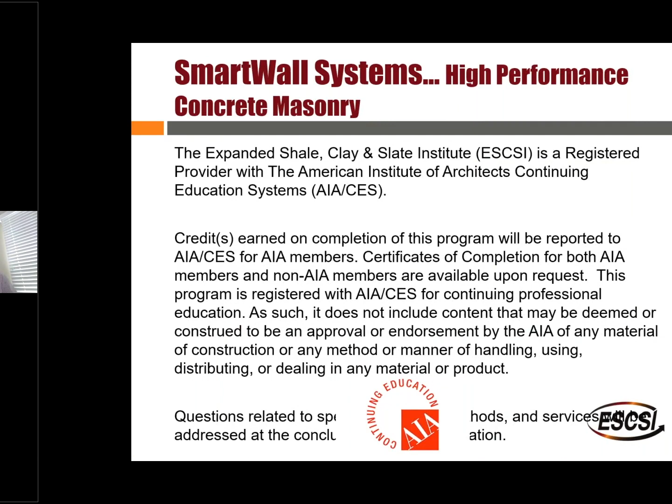This is an AIA registered, or will be registered, presentation - a little bit more bookkeeping. For those of you that need the learning objectives for AIA: we're going to learn what SmartWall CMU are, understand how they outperform normal weight CMU, develop awareness of how lightweight next gen CMU greatly enhance wall performance, and then learn how to properly specify these materials.

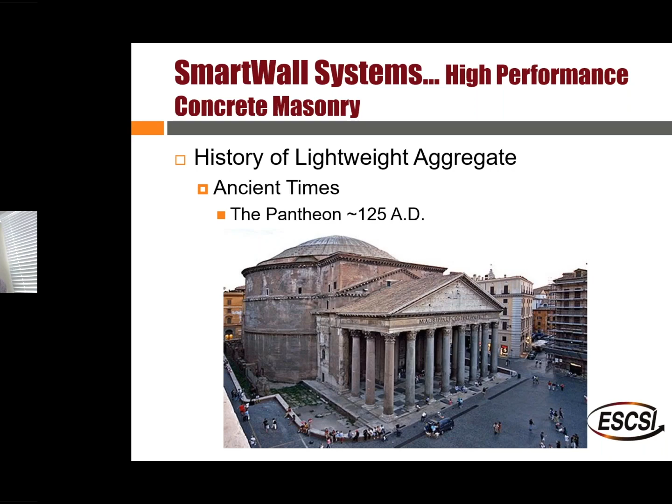Darren mentioned briefly the products that were used today. Expanded shale clays and slates have a long history dating back 2,000 years ago to the Pantheon in Rome. It was a natural lightweight aggregate from volcanic activity, used in the dome. It still performs today.

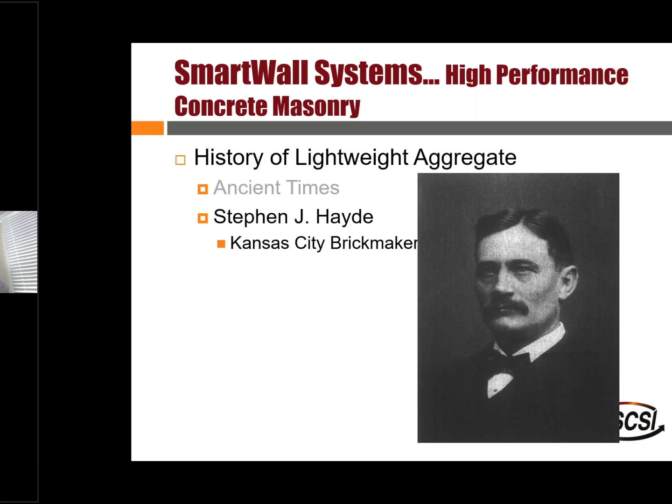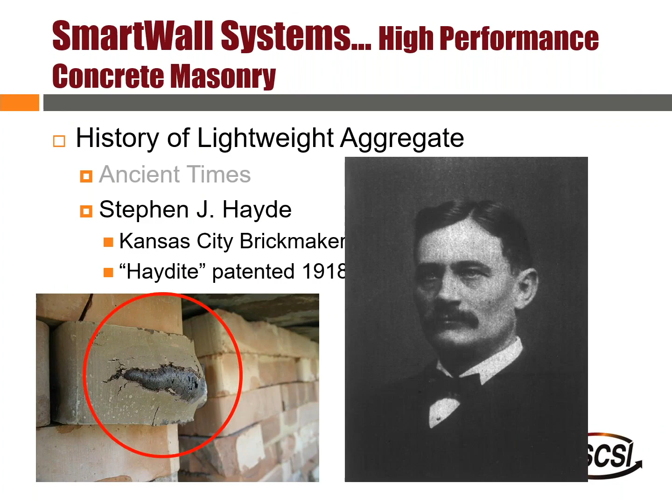He patented that in 1918, about 100 years ago, and he promptly gave the patent to the US government for World War I to make ships. The Navy had a shortage of steel. Some of those ships are still used as research labs - Galveston Bay, a river in British Columbia. Take samples from those, and the concrete is performing incredibly well - an incredibly structurally efficient material that continues to gain strength after almost 100 years.

The way we make lightweight aggregate today is in a rotary kiln, so it's sort of a controlled volcano, if you will. We heat the material at temperatures approaching 2,000 degrees Fahrenheit. It is not as hot as a cement kiln, which gets upwards of 2,800 degrees. The raw material is quarried, or depending on the source - clay, shale, or slate - sometimes you have to dig it up and quarry it, and sometimes you can scoop it out if it's clay, essentially with excavators.

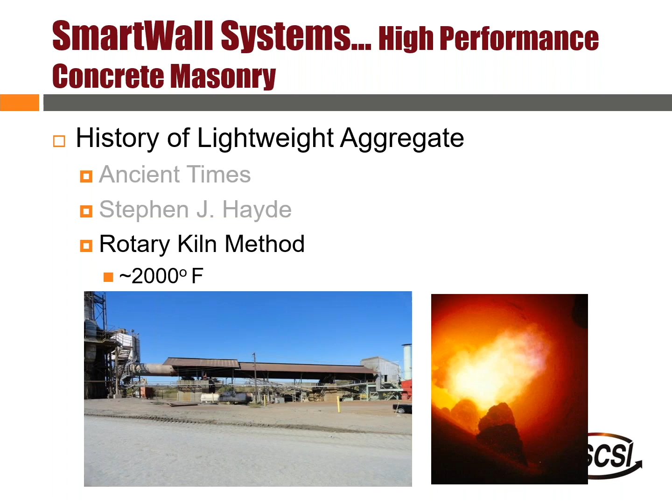The material goes into the kiln, it's heated up, it expands. It's not a drastic, rapid expansion like popcorn, and it doesn't melt completely like cement manufacturing does. When the material leaves - that's a shot of the inside of the kiln, I think you can see my cursor - it's sort of rolling as the kiln spins, and the kiln is tilted, and it leaves the kiln and is cooled off.

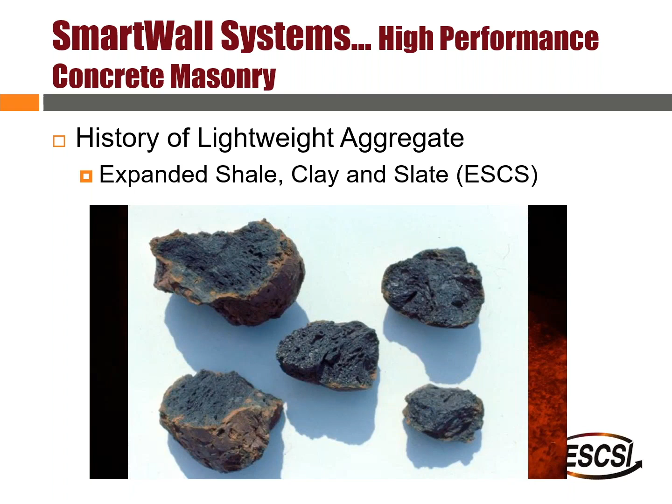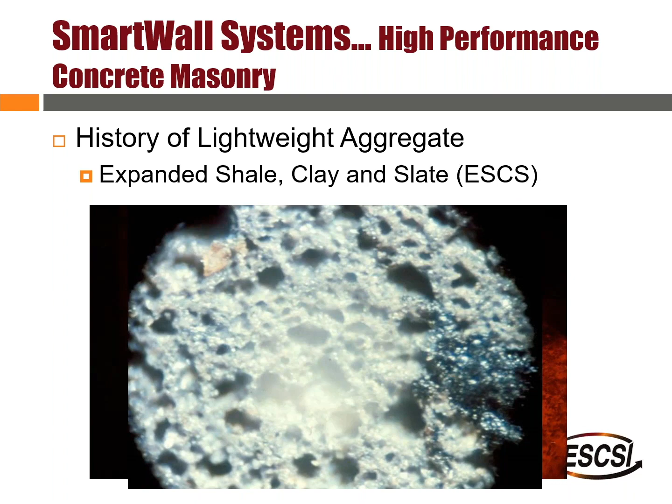You can see these particles here are basically crushed in half. There's a coating on the exterior, and there's a lot of pores. These pores are not interconnected by and large. If you look at a closer shot, you can see it almost looks glassy and ceramic-like. So this is what we like to call modern day expanded shale clay and slate material.

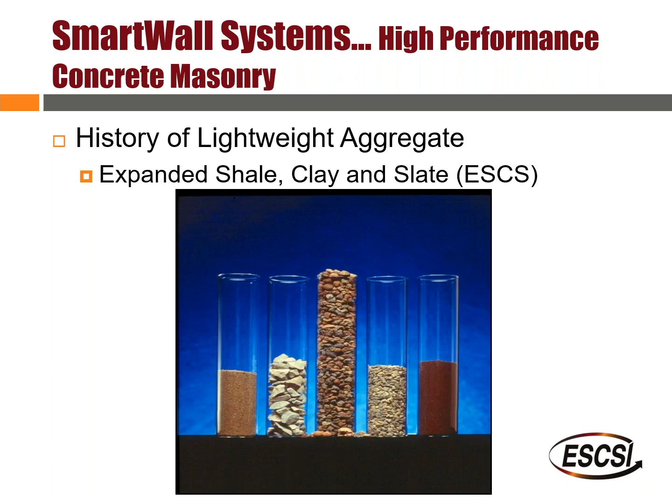But there are a lot of other benefits that this product has other than weight, and we're going to touch on some of them and some of the other applications, but we're going to focus on lightweight block, and then I'm going to do a ComCheck example with the energy codes and masonry.

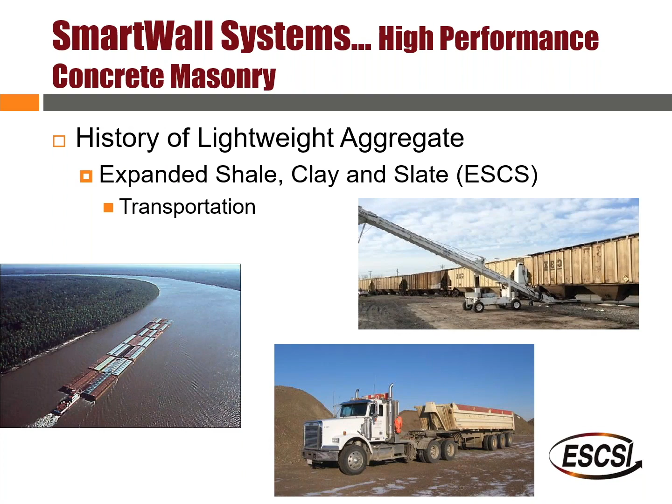Some of our members actually will export material overseas and into the Caribbean.

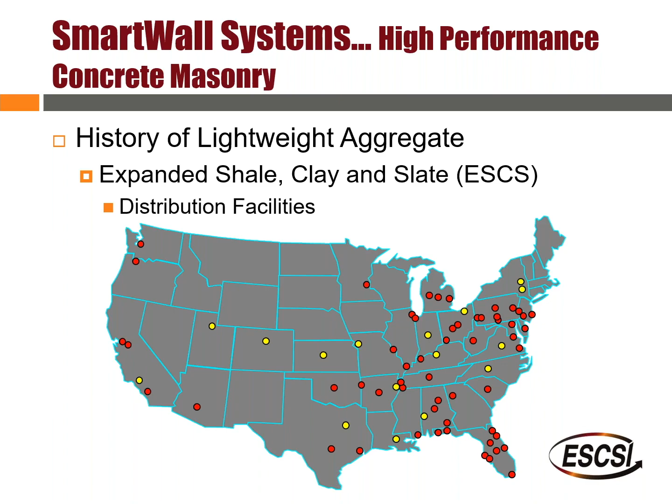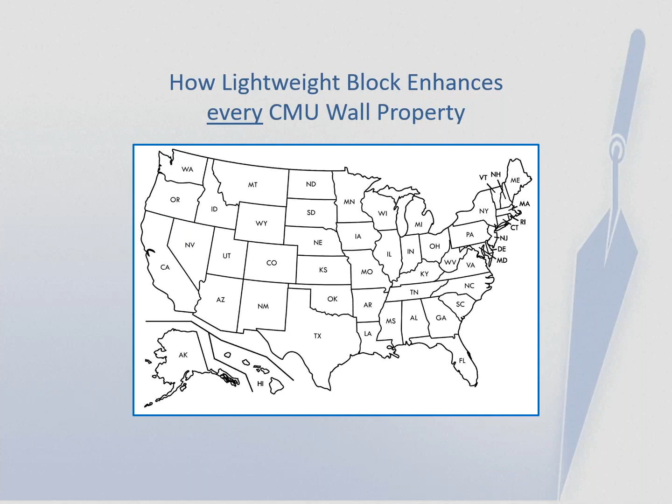We're going to focus today, as Darren mentioned, on high performance concrete masonry, and specifically with smart wall, and that's a term that the ESCSI coined to sort of generically talk about lightweight block. But smart wall helps CMU, they're obviously lighter, they're going to be stronger. The specification that we recommend going to provide higher R values, better fire ratings, lower wall costs. It's a lot easier for the mason to pick them up and lay them, obviously. They're lighter, you can get more block per truck. I'll show you an example of that. And they also have lower silica content. So we like to think lightweight block enhances every CMU wall property.

Just a quick diversion here for fire safety. Lightweight block are easier to get fire rated. When you make them out of lightweight aggregate, you don't have to use as much material.

But in general, everyone is probably familiar with the fact that we now have the International Building Code, which was a combination of the three model codes from 15, 20 years ago, the Southern Building Code, Uniform, and then the BOCA.

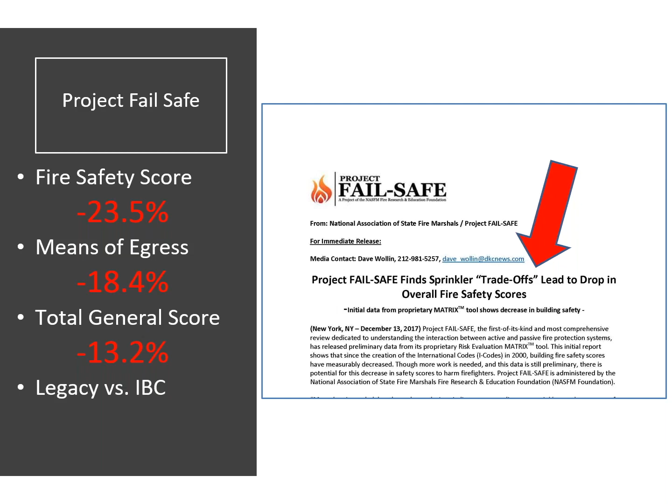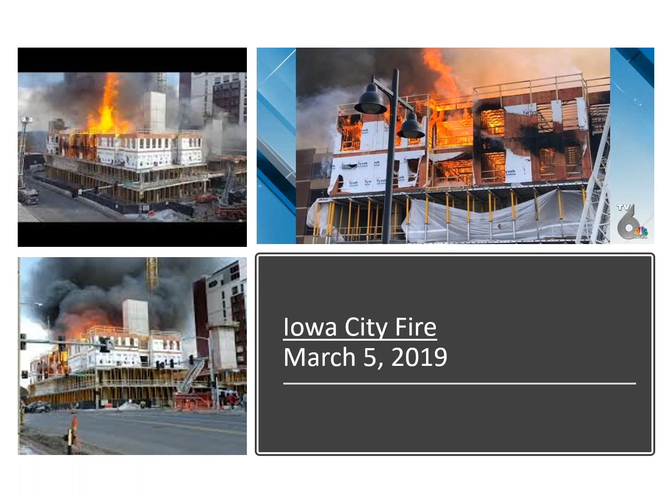But Project Failsafe, a bunch of fire marshals looked at this and they've realized over time that the actual fire safety scores have dropped as a result of this. We have a whole presentation on that. I'm not going to go into it today, but you may recognize fires like this are happening all over the country where you have a pedestal, either poured concrete or concrete block, and then on the top, 3 or 4 stories, you have a very well-organized lumber yard. Oftentimes, these things catch fire. There are no active systems involved. Usually, the whole thing burns down. The only thing left remaining is the non-combustible concrete or masonry.

We dig up a lot of data from NFPA. There are cost studies that have been done to show how cost-effective masonry walls are versus other systems. And even most recently, everyone's probably aware that the cost of lumber is skyrocketing, whereas masonry is pretty much consistent or constant. So that's another presentation we have.

That's how much the block will weigh. Smart wall units are made with high quality structural grade lightweight aggregate, expanded shale, clays and slates, and that aggregate meets ASTM C331. There's a specification for natural stones and gravels, ASTM C33. This is just the lightweight version of that, C331.

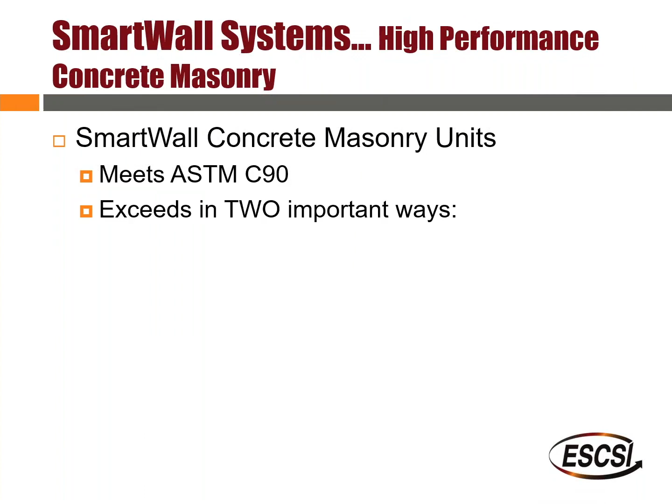So they meet C90, but they exceed it. Smart wall units do in two important ways: they're going to be stronger. 2,500 PSI is the minimum strength, giving you a 25% stronger block versus typical ASTM C90. And they're going to be much lighter—less than 93 pounds per cubic foot.

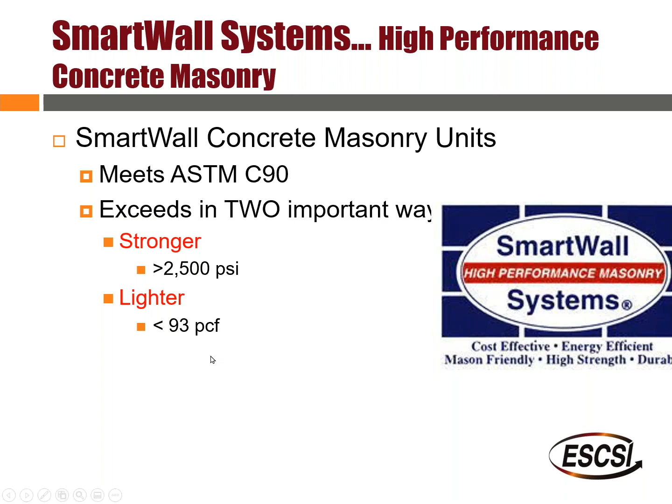The 93, you might wonder why that's not a round number. That goes back to when there was a big effort to have the SI or metric system imparted throughout the country, and that translated to 1,500 kilograms per cubic meter. I do know there are producers of smart wall units or lightweight units that actually go down to 78 pounds per cubic foot concrete. So in a typical 8-inch block, you're going to have a 40% lighter unit.

And you can make them so incredibly light, in fact, that even this young lady can pick them up and not struggle with them.

So here's some comparisons. A typical 8 by 8 by 16: 25 pounds versus 40 if it's normal weight. A 12 by 8 by 16: 35 pounds versus 53. And in many places, once you get above a certain weight, the unions require you to have a 2-man lift to pick up that block. So both of these normal weight units in some markets would exceed the 1-man or 1-person limit.

So again, it's going to be lighter and it's going to be stronger. I have some duplicates there. So the lighter aspect is very crucial for keeping wall costs competitive, or in fact lowering them.

When you look at what's involved in the costs of a finished masonry wall or CMU wall, it's the cost of the block to make, the freight to deliver it, the labor, and then life cycle energy costs. I'm going to focus on an example with the energy code towards the end of the presentation that shows how lightweight block makes it easier to meet the energy code.

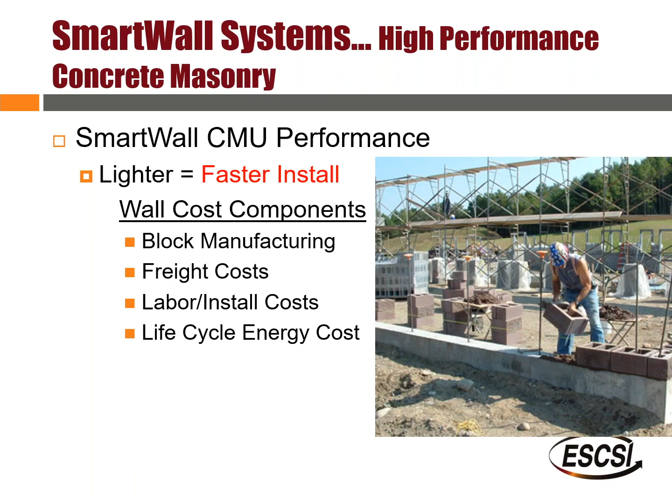So the economics of lightweight masonry—in many markets around the country, you'll hear masons say lightweight units cost more. If I was to superimpose on a map the lightweight aggregate plants versus quarries and natural stone, there would probably be 20 times as many dots—lots more locations of normal aggregate. So there's sort of a thought that lightweight aggregate costs more, the units cost more.

But the point is, when you install it, about 60% of the wall—and in some cases even more—is the mason's labor to put it in the wall. So when we operate on that 60%, the cost of the block usually isn't really a big factor. But the way the industry works, everyone knows low bids tend to win, and a mason contractor thinks that way when he looks at pricing his block.

So we have an education effort that's been ongoing for quite a while. It started with some studies done in the late 80s. It's a combination of the Expanded Shale Clay and Slate Institute, NCMA, the National Concrete Masonry Association, and the Mason Contractors Association of America. There was a demo project at a warehouse in St. Louis.

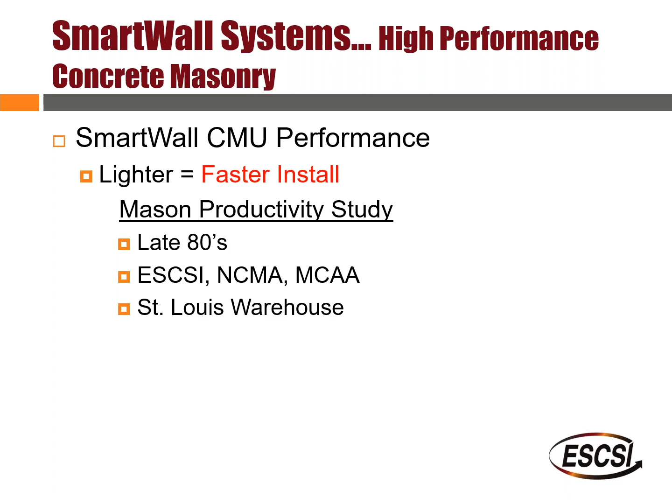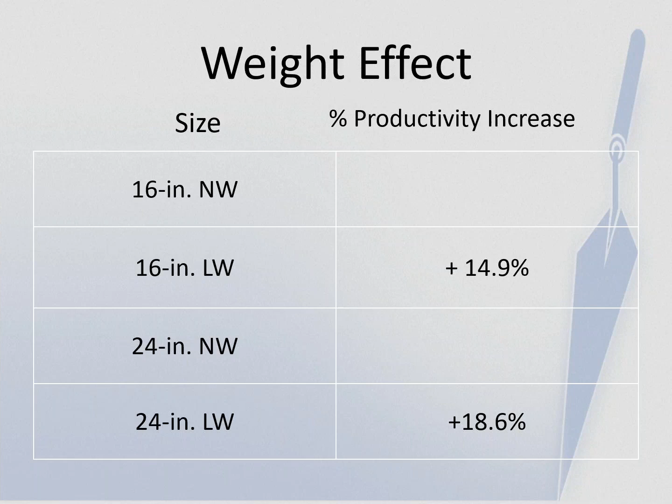First, they looked at the effect of weight going from normal weight units—16-inch normal weight to 16-inch lightweight, or a 24-inch long normal weight unit to a 24-inch lightweight one. The increase in productivity just from going to lightweight material was about 15 to 19%.

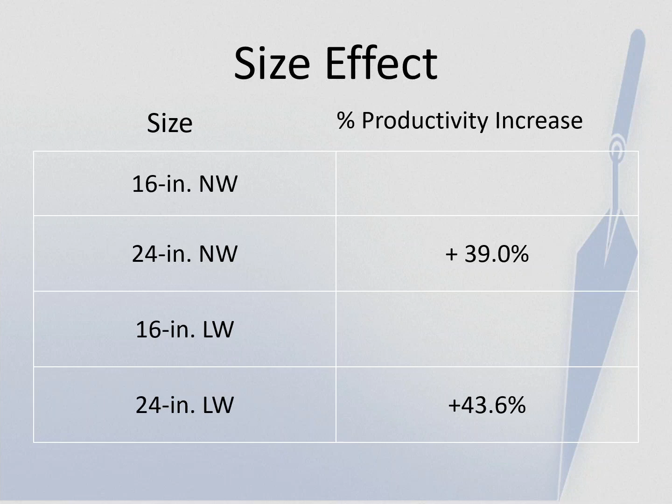If you looked at a 24-inch long unit—there are some markets today making even longer units, starting to be installed, believe it or not, by a miniature crane to assist the mason, though in some places manpower still does it—you get about a 40% increase in productivity roughly for both 8s and 12s, referring to the depth or width of the block. If you combine those two factors, you get an increase in productivity of about 65%.

So that catches a lot of people's attention.

A lot of mason contractors like to dwell on that, especially the masons down in the Louisville, Kentucky area. I know there's a producer down there, a block producer that makes very lightweight units. The masons love it. They're very successful.

Up in the Chicago area, closer to where I live, a producer made 24-inch long block on a project about 10, 15 years ago. It was 50% larger units, and it was 3 pounds lighter than a typical 8-inch block.

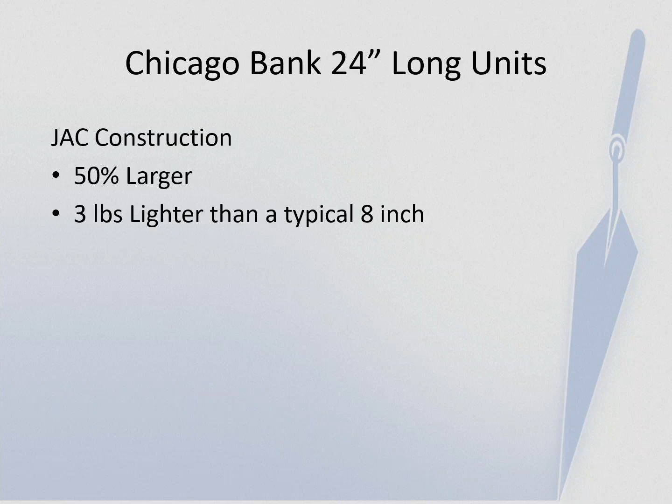The increase in productivity needed on this particular job was double what was needed to offset the price premium. And man-days wise, they actually reduced the length of time to complete the project, so that's always a good thing. 17.5 fewer days, a reduction of 23%.

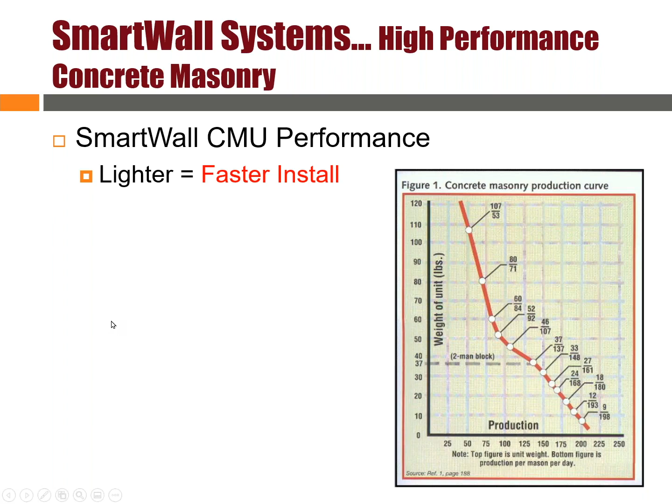There are some charts that have been around in estimating books for a long time. If you look at this chart, the heavier units are towards the top left. If you have a unit that's 107 pounds, they figure you'll get 53 in a day. As you come to the bottom right, let's look at a 24-pound unit in this area right here. You can lay 168 of them. So that's borne out by that project in Chicago, as well as the study that was done years ago in St. Louis.

One way to use this chart is to consider a mason's wage. These numbers are a little old, dated from the Southeast US, I think it might have been the Florida or Georgia market. Normal weight block weighing 37 pounds, lightweight 28, SmartWall 24 - you would lay 137 or up to 168 block a day. If that building they were building, let's say it was a Walgreens or maybe a small Target, had 60,000 block, it would take normal weight block, where you lay 137 a day, 438 days to complete. Or if it was the SmartWall units, the light ones, 357 days. So that's a lot of savings that accrues to the mason contractor and to the owner.

And I didn't mention, but you can see on the chart here, there's this line where it says a 2-man block, 37 pounds.

Another way to look at it: there are some estimators or mason contractors that think or figure that a man or mason can only lift so much weight per day - I don't know whether this is an old union rule or not - 6,000 pounds. So if that's the limit you can lift a day... I know today UPS, FedEx, if it's over 75 pounds, you have to do something special to ship it. So normal weight at 37 pounds to SmartWall, you could lay 162 or up to 250 if it was the SmartWall. Again, depending on how you look at it, the savings here are quite a bit more.

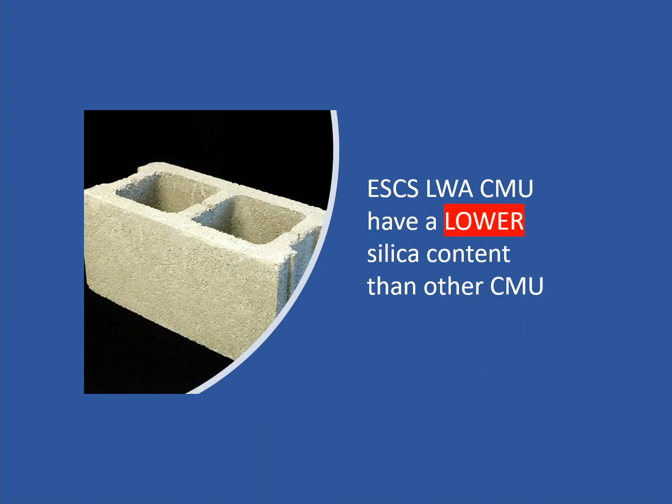One thing I do want to point out quickly, since we're talking about mason contractors, is that expanded shale, clay, and slate material has lower silica content than natural sand and gravel. That's a good thing, considering there is a lot of cutting that goes on at masonry sites. There are special types of saws, but it's good to know that you have an aggregate that reduces the amount of silica.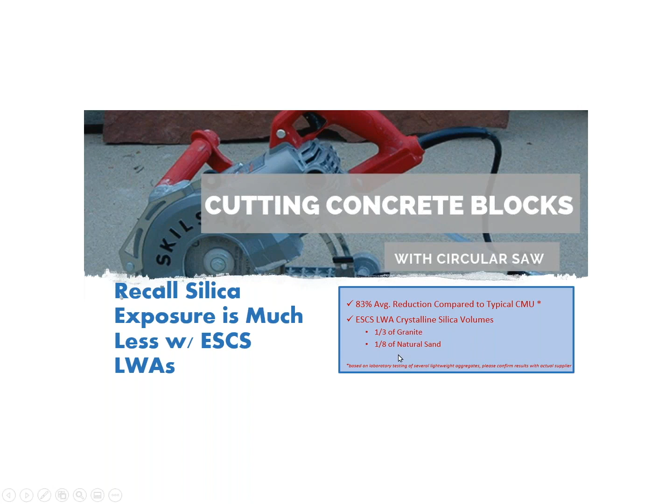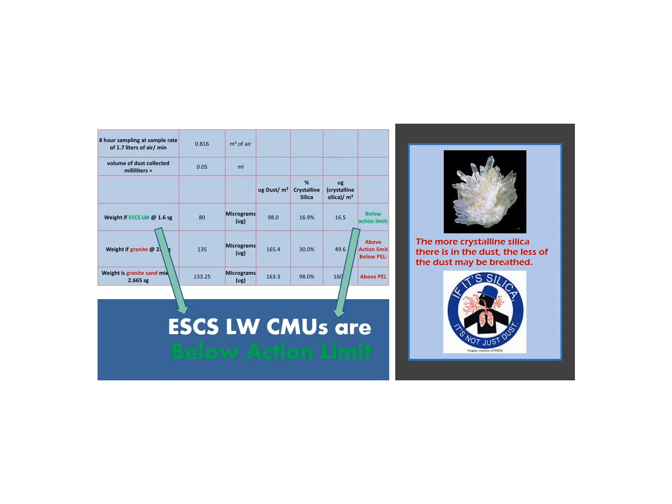So when you look at what this means over a typical workday, in your cutting of block, the crystalline silica exposure is below the action limit that OSHA sets, which is a great thing. I'm not recommending that masons wouldn't take protective measures, but it's just nice to know that with this particular aggregate, you don't really have to worry about it.

So let's focus now on structural efficiency. We're going to have a better strength-to-weight ratio here with SmartWall units.

The industry for many years was very conservative in the way we approached concrete masonry units testing and our tables for what the strength of the wall would be, or what we call F'(M). That is not the strength of the block, that is the strength of the wall itself. That's what the structural engineer uses. In ready-mix concrete, we're familiar, it's F'(C).

But there were changes made to the design code in 2014 that recognized that modern production, modern installation, we were getting way more strength in the wall than the table that had been there for a long time. There was another change 10 years ago in ASTM C90 that resulted in what we generically call next generation block, or CMU. I use those terms interchangeably, where you can now have up to 5 times less cross-web area and get the same structural performance. Both of these, the change in the design strength from 2014 and ASTM C90 in 2011, have big impacts on units that are being produced and installed in the market today.

The industry looked at this and realized, well, our block, modern production, et cetera - they did some correlation testing that sailed through TMS fairly quickly. Today, the minimum is 2000 PSI strength, which gives you 2000 PSI in the wall, and 2500 also gives you 2500 PSI F'(M). So that results in quite a bit of strength increase in the wall that the structural engineer can use. When you have this increase in strength, you can reduce the amount of rebar that you have in the wall, or you can make the units thinner. Instead of a 12-inch wall to go 24 feet tall, you could go with an 8-inch unit and save material costs there.

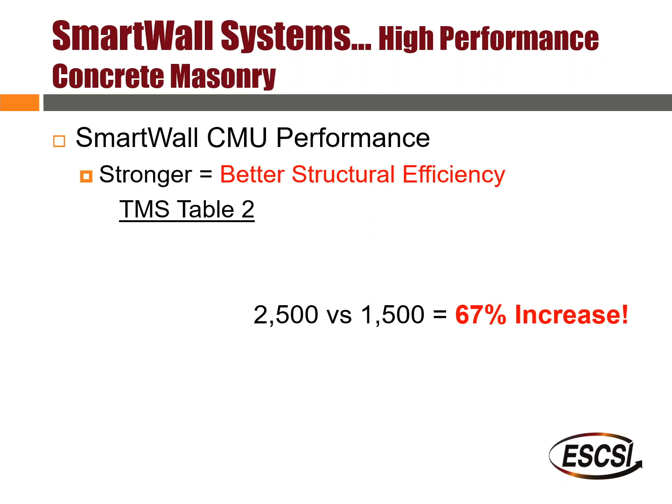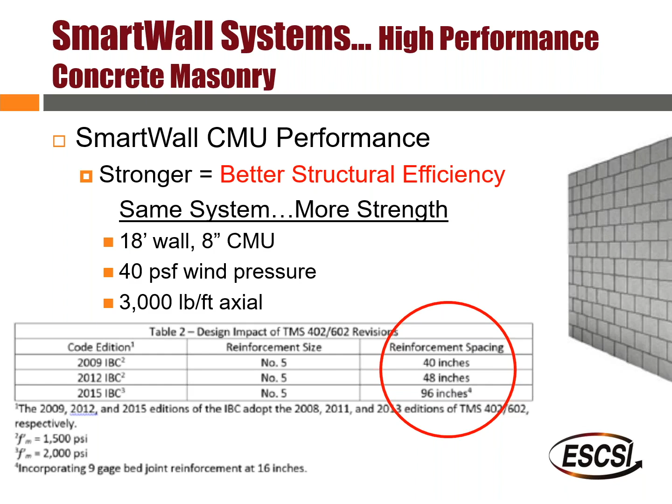Here's an example wall of what's happened as a result of the changes in TMS. It's an 18-foot wall, 8-inch CMU, 40 PSF wind pressure, 3,000 pounds per foot axial load. If you look at the 2009 to 2012 to 2015 IBC, the rebar requirements were that you had to be 40 inches on center vertically, which now you can space as far apart as 96 inches - a lot less steel being used, which means you have a lot more insulation in the wall, which means you're going to have higher R values. So 40 to 48 to 96, which leads up to the COMcheck example that I'm going to get to shortly.

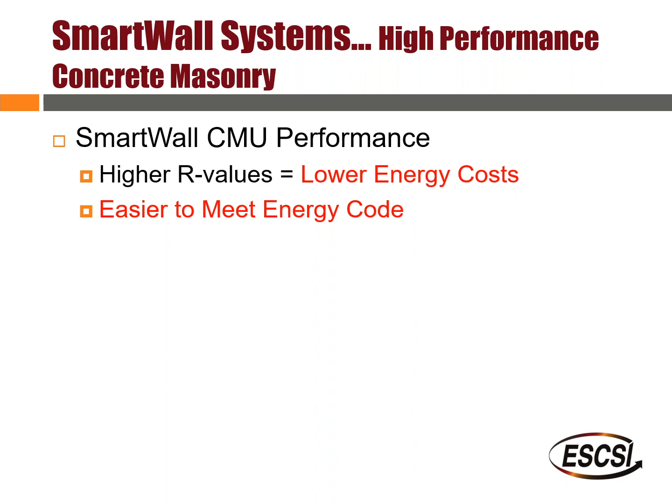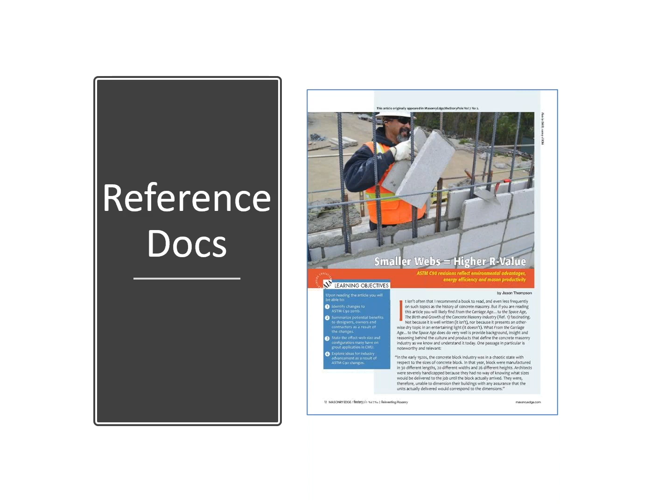A mention of some of the reference documents - AIA always likes for the speakers to provide a little bit of background on where their information is coming from. So here's one of them: this is an NCMA article that appeared in a magazine about the time the ASTM C90 change in 2011 happened.

Basically, smaller webs equals higher R values. This is written by Jason Thompson from NCMA, who's the VP of engineering. This mason here laying these units, that's a one web unit.

It's probably a jail or some type of heavy industrial facility, because you see the bars are heavy seismic zone. They look like they're placed every 8 inches.

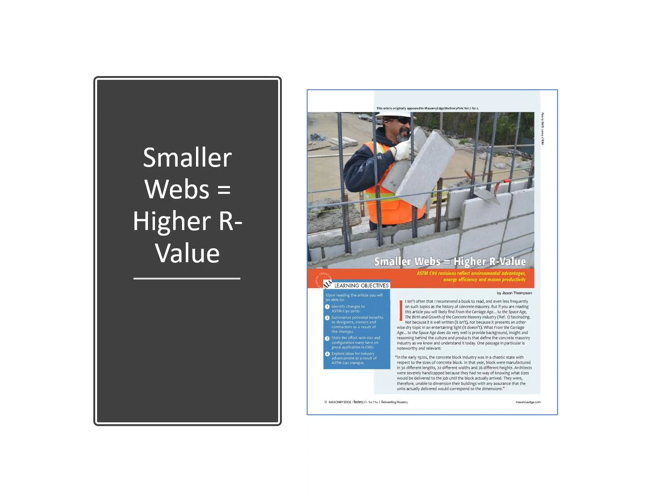But generically, one way to think about next generation block, you're going to have skinnier webs. If you look on the right-hand side, skinnier webs means more space available for insulation and you get higher R values. On the left, this is an old pear-shaped, as we called it, or tapered web.

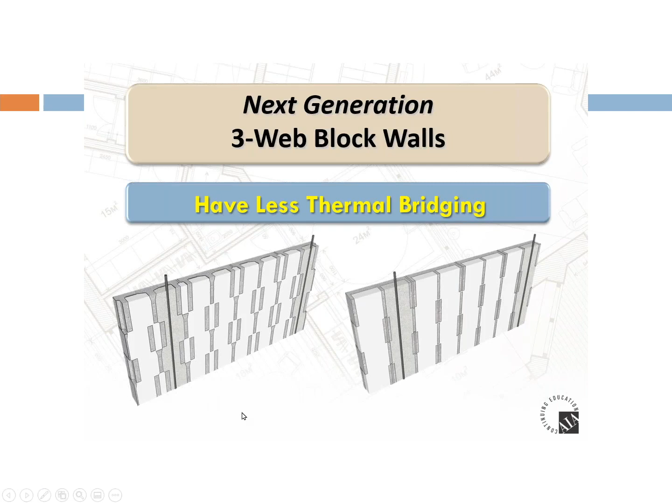So the webs can be thinner, giving better thermal efficiency as a result. You can make them in 3 web units, as you see here on the left, or one web unit, as you saw in that earlier photo. In the industry, sometimes we call these A block or H block.

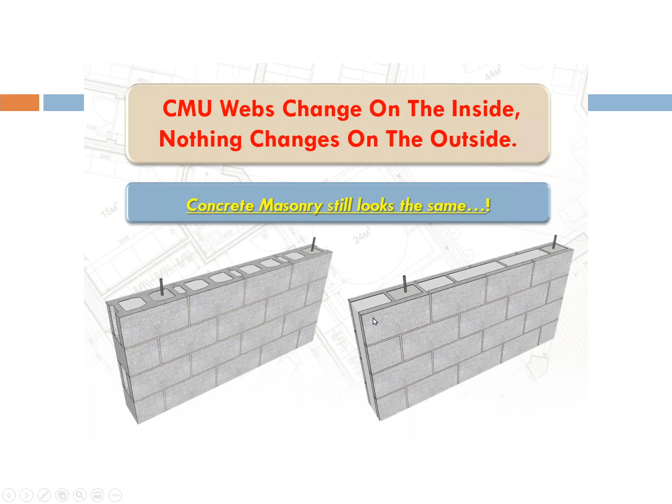On the outside, the block is still going to look exactly the same. You're going to get the same performance structurally. The dead loads are all carried by the face shells. When we lay the block, we always use face shell bedding only. We don't typically put mortar on the cross web. So the load bearing surface area has not changed.

So just graphically, you can see here, this is a combination of A block and H block. You have a lot more insulation in that wall.

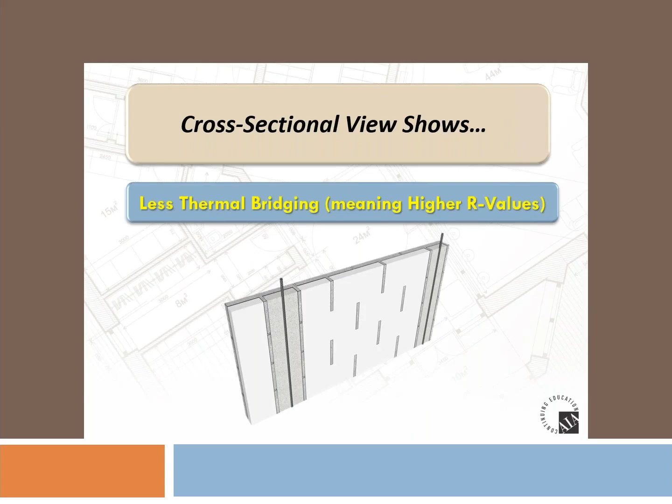NCMA has a thermal catalog on this, with values in there, and the reason these catalogs are important is to use ComCheck. You need to put customized values of the U value and the heat capacity of the unit, which is a proxy for thermal mass performance. You have to put customized values into ComCheck because it has embedded values that are very conservative, based on insulation types like loose fill insulation, vermiculite and perlite, that are almost never used these days.

So you can see this catalog that NCMA has, there's three web, two web, one web units. The Expanded Shale Clay and Slate Institute has a version of this that they've been working on. There are individual manufacturers that have this. It makes it easier to meet the code.

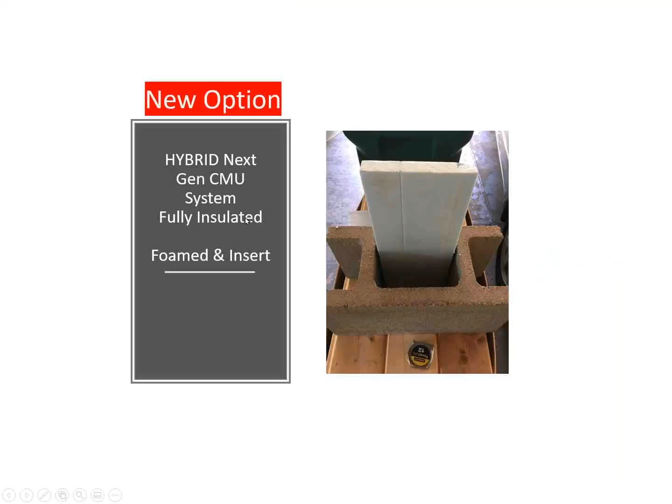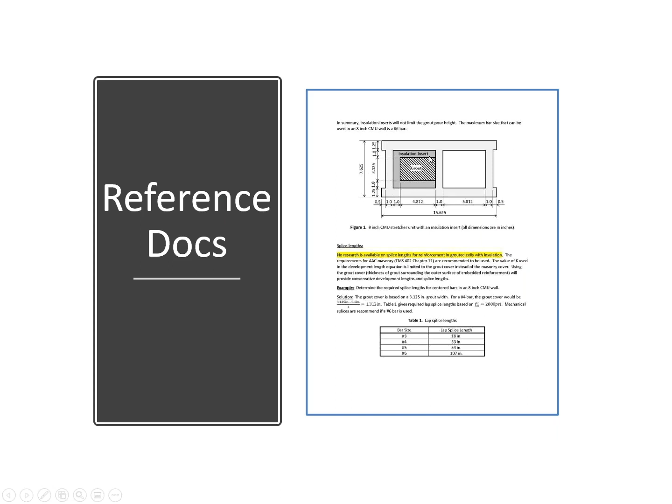And the reason I reference this paper, Dr. Bennett from the University of Tennessee did some research to make sure - I'm not going to go through this in detail, but you can see the drawing here. Here's a typical block, there's the grouted area, there's the insulation insert to let us know. You can use these units and you're not going to have any degradation in your structural performance.

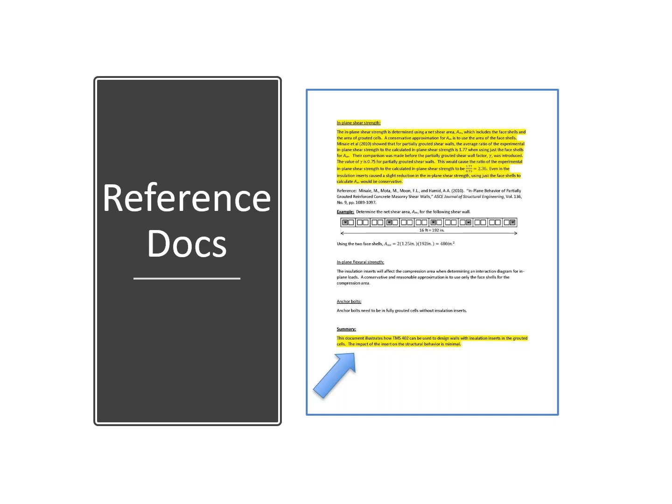Or it's a minimal degradation, I should say. It doesn't have a big effect, and you can design around it.

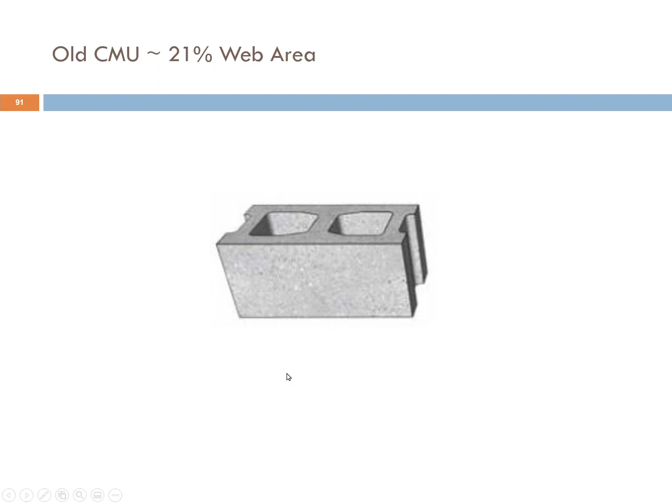Here's a typical old-fashioned 8-inch block. You can get as low as 4.5%. An old block had 21% cross web area, and the cross web area is simply the three webs. They're 7 5/8 tall by 1 1/4 inches. You multiply that out and divide it by the 8 by 16 face of the block. So it's a reduction that can be up to five times less.

We're not seeing too many units like this. What you tend to see is a two web unit like that.

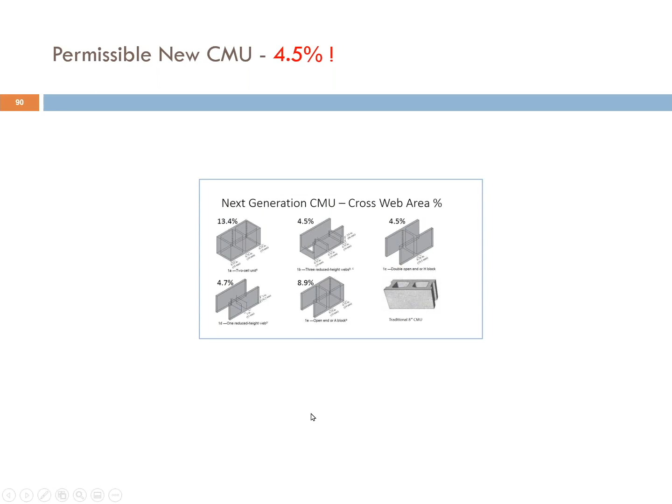So the benefits of next generation block: faster install, higher R value. Sounds just like the benefits of lightweight block, sounds like the benefits of smart wall, and indeed they are. When you combine all these things, you get concrete masonry units on steroids that perform very well. Masons can complete more jobs, fewer injuries, healthier masons, more profits, easier to meet the code. They're green, there's less material in them - two web block, like I showed on the prior screen.

Sorry about that. The two web block would have about 10% less material than a typical 8-inch unit, or 25% less if it was a 12-inch unit. So less material means fewer delivery trucks to bring the aggregate to the block plant, less energy to cure it in the kiln.

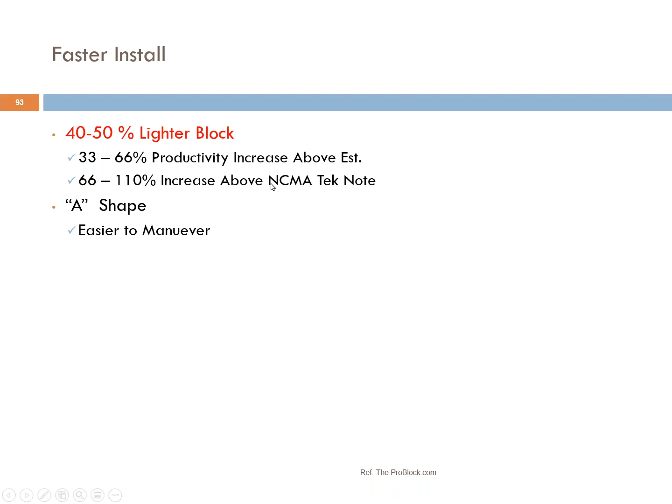That accrues to beneficial sustainability terms. The next gen block combined with lightweight block, there was a study done in North Carolina. These A blocks are much easier to maneuver, and the productivity they found in the newer study was quite a bit above what reference documents would say, 100% above what NCMA's Tek Note had.

A lot of that has to do with this rebar and this open end. You do not have to lift the block up and over or struggle like that mason in that photo earlier, even though that was the rebar 8 inches on center. And you can use less rebar because you don't have to have any lap splices potentially. You can just put the length of the bar into the footer and build your wall 12, 18 feet, whatever it is, and you wouldn't have to have any lap splices. So that's a benefit as well.

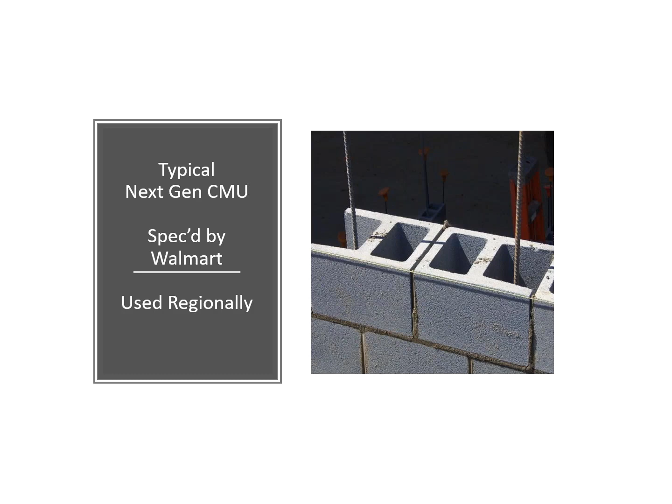So when you make these units with lightweight aggregate, and this is the insulating foam here that's typically used today, you're going to get 2 to 3 times higher R values. These are numbers right out of Jason Thompson's thinner webs equal higher R value article I showed you earlier. An 8-inch old-fashioned block filled with foam would give you an R value about 6. Next generation version of it gives you an R value about 15. Same sort of trend with 12-inch block.

I'm going to stop there for just a moment. Do we have any questions, Abigail or Darren, so I can take a quick sip of water? No, not yet, you're doing good, Kevin. Thank you, okay, just wanted to check.

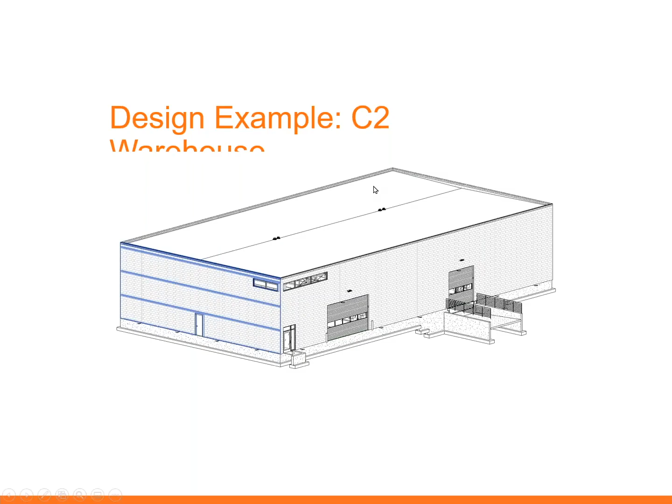Well, I guess Alaska's in climate zone 8, Hawaii's probably 1 and 2. But there are minimum R values for roofs, walls above and below grade, floors, slabs, etc. And then different types of roofs, different types of walls, floors, and so on. And that's why that table has so many numbers in it. I took the R values out of that table and retyped them here. It's a little easier to see. And each of the climate zones are represented here. I'm in climate zone 5 and 6.

And if it was a residential wood frame wall in Wisconsin, I'd have to have an R value of 20 between the wood studs plus 5 continuous is what this means. Or if it's a commercial building, not a residential, this could be an apartment building, I would have to have R13 between the studs and 7.5 CI, continuous insulation.

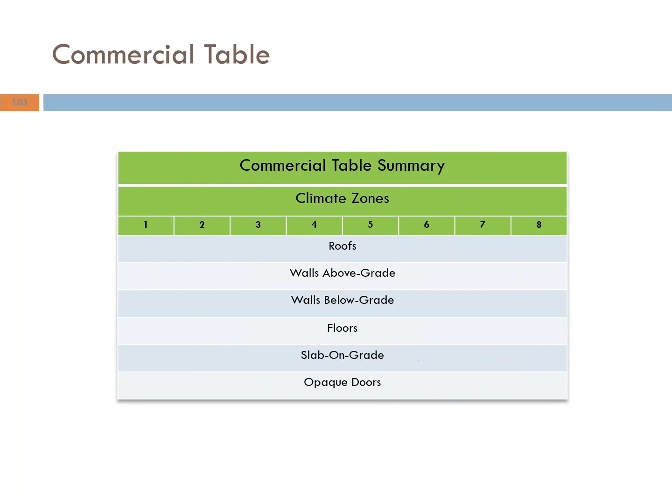Well, a lot of the competitive wall systems will show designers this table that's in the code, and they'll explain that because you have this plus 10 or this plus 7.5, that means you have to have continuous insulation, and continuous insulation is like sheathing on the exterior or drywall on the inside. If you're going to do that in a masonry wall, you're going to have to do it in a cavity wall, which increases costs and doesn't allow you to do single wythe walls.

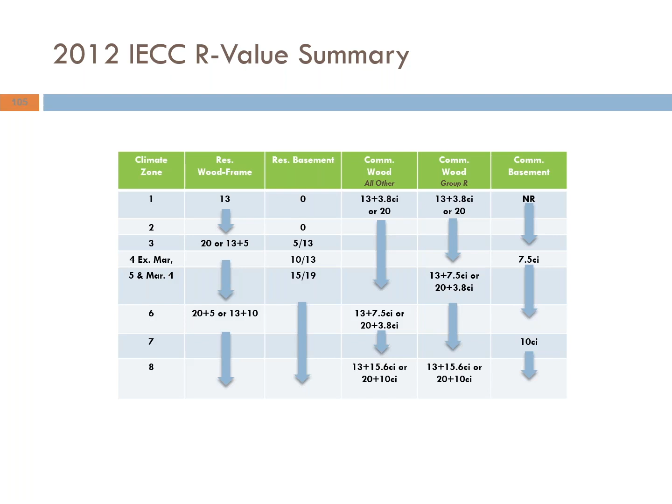So I'm going to just show you, here's an example, I'm going to do a mass wall in our climate in COMcheck. But the one thing I need to say, and everyone needs to understand, if you use this table, this is the only time continuous insulation is mandatory. There are 3 other ways that you can meet the code where continuous insulation is not mandatory, but the competitive wall systems, they don't share that information with you. So I'm going to share it with you now.

And the definition, here's ASHRAE's definition. That's ASHRAE, the folks who write the standard 90.1, which gets adopted as the IECC by the International Code Council. Continuous insulation is continuous across all structural members without thermal bridges other than fasteners and service openings. So you have to be able to adhere this continuous insulation somehow, anchors or nails, screws, etc. But it is not mandatory.

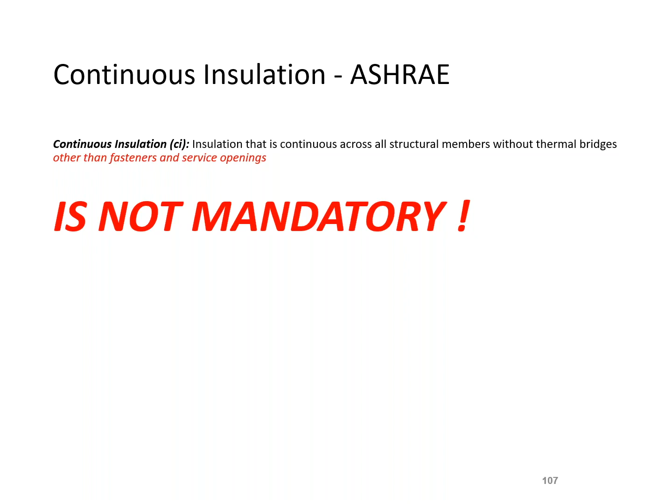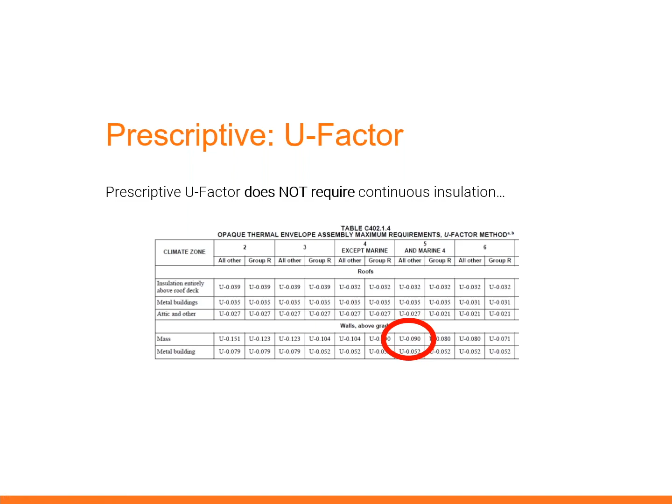We're going to look at 3 different block types, maybe 4. Option 1 is a 12-inch block, medium weight. Option 2 is an 8-inch block. And option 3 is next gen with inserts.

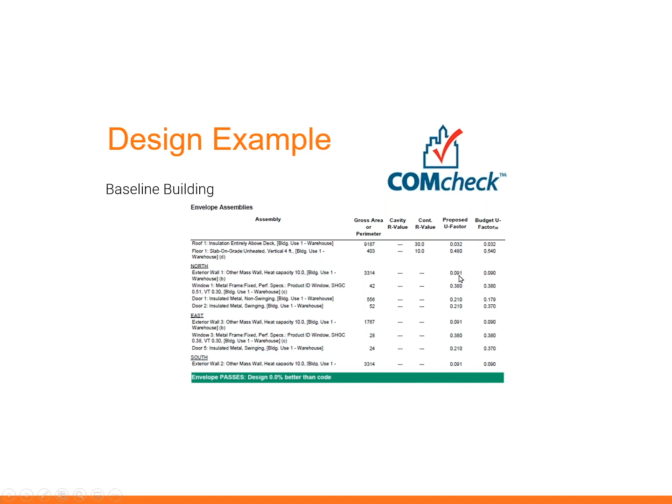In this COMcheck run, if we plug in the minimum R value from either the prescriptive R value table, or the U value of 0.091, and we have the area for the walls, windows, doors, etc. The areas are all here, the R values are here, this is the roof. It passes the code and it's 0% better. The green line means we're good, we pass, we COMcheck, but we're not any better than the minimum, which makes sense because we plugged in the exact U value requirement.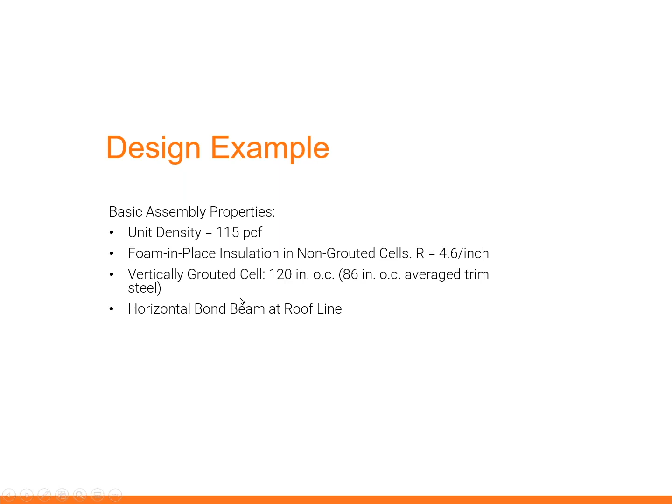So if we were to try to build this with a medium weight unit, 115 pound per cubic foot, foamed in place insulation, vertically grouted 120 inches on center. I guess there's some extra steel in this example. This comes from NCMA because of the bond beam at the roof. It's about 86 inches on center. If we look at a typical 12-inch block, we can go to a manufacturer, or go to NCMA's website and plug in

the geometry of this unit and fill it with foam, and we'll find out that we only have an R value of 7.19, which is a U factor of 0.139. What we need is up here. We need the 0.090 or the 11.1. We're not going to be able to build this building with this type of block and pass the energy code.

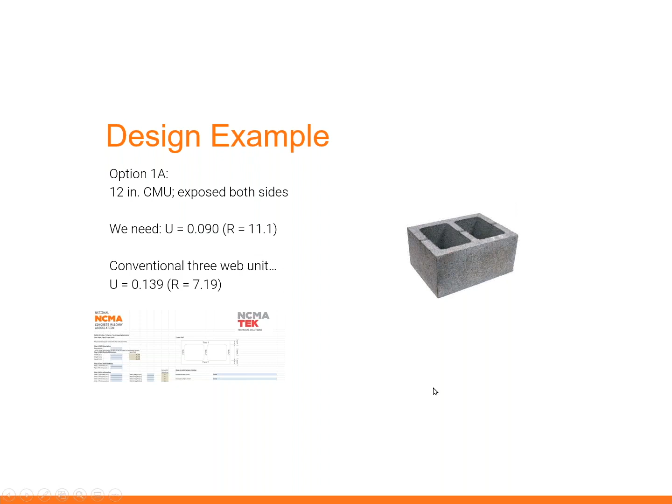So let's look at a different example. Let's look at an open-ended next generation block. Plug it into NCMA's calculator or get the value from the manufacturer, and we're still a little bit short. It's an R value of 10.14. We're not going to get there.

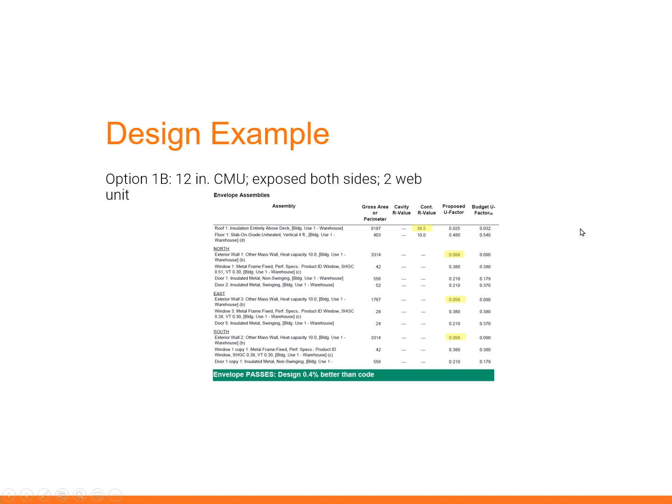So let's, I think this slide got out of order. Oh, I'm sorry, it's not out of order. We plug it in, but what we had to do in order to pass, this is the yellow highlights or the U factor of that unit, but up here at the very top, I should have just highlighted that right there. The roof insulation changed from R30 to R38.5, and we're able to pass slightly better than code. We might have been able to do that with the other unit as well, but the R value of the roof had to go up quite a bit more.

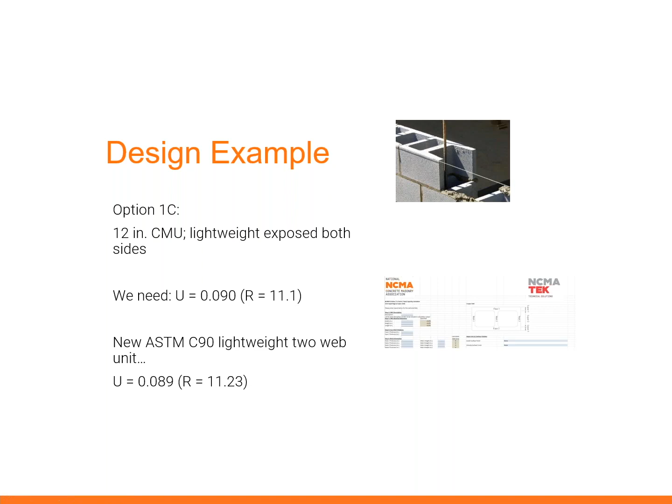So let's see if we can get this to pass using lightweight. We're going to now use a lightweight unit. The R value is 11.23. This is the C90 lightweight, so it's 105 pounds. It's not as light as the smart wall I've been talking about. And we put the insulation in the roof back to 30 where it was originally. We plugged in the new 0.089, and we're 1% better than the code.

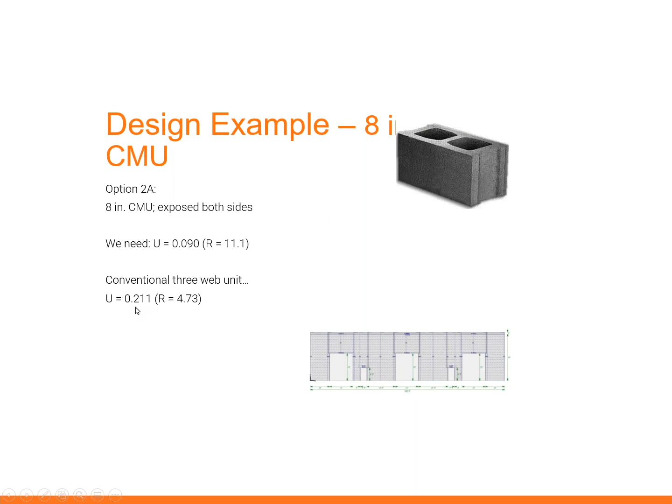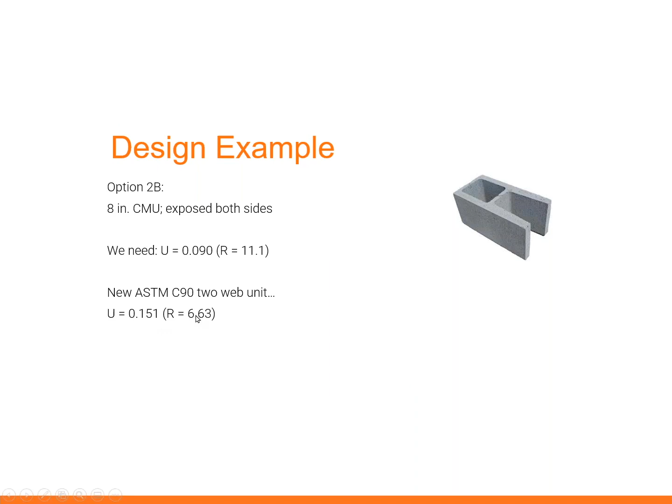Let's see if we can do it with an 8-inch unit. 8-inch with medium weight, the R value is only 4.73, U value 0.211. We're not going to get there, but we could try to use an open-end unit. We still don't get quite where we need to be. The R value is still about half of what the minimum code required.

So we'd have to put a lot of insulation in the roof, or we could finish out, fur out, and put finishes on the inside of the building. This comes out of NCMA's catalog. This looks like, it's a little hard to read, but there's polyurethane insulation in the block, and there's some insulation that should be between the studs.

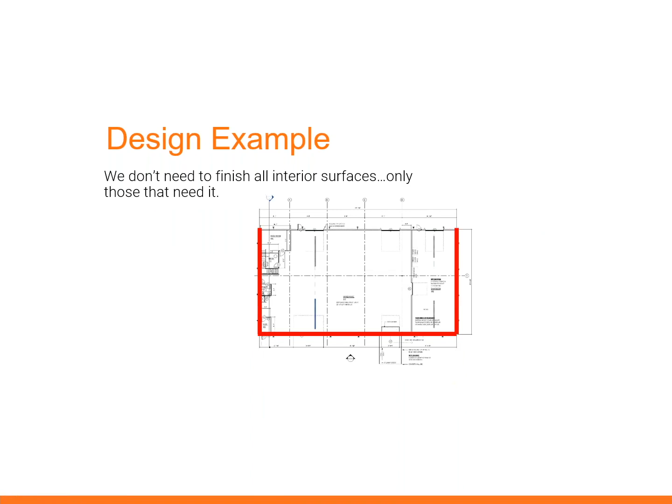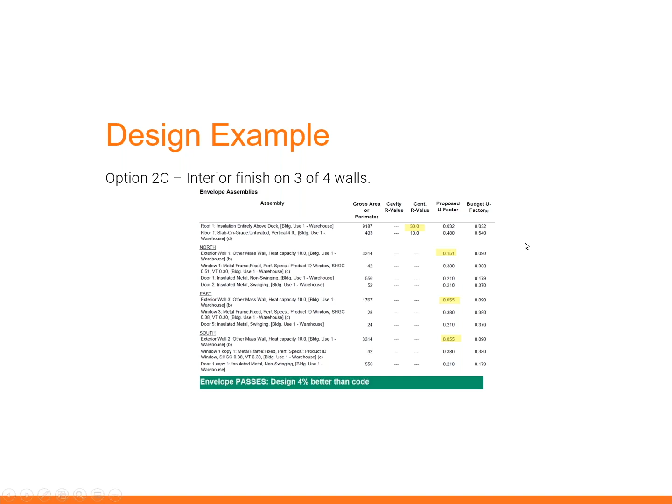You don't have to finish all the interior surfaces when you use COMcheck. We could just do 3 walls of that building, bump the R value or lower the U factor on 3 of them. It's a little hard to see this, but this was originally where we started, 0.151 with just the block, and then those furred out units, we get a much lower U factor. The roof is back where it was, and we're able to pass the code. But there are many, many examples where they want to have a hard surface on the interior, or they don't want to fur out the interior at all, and that's what leads us back to using lightweight all the time, or next generation lightweight or hybrid units, and I'll show you that here shortly.

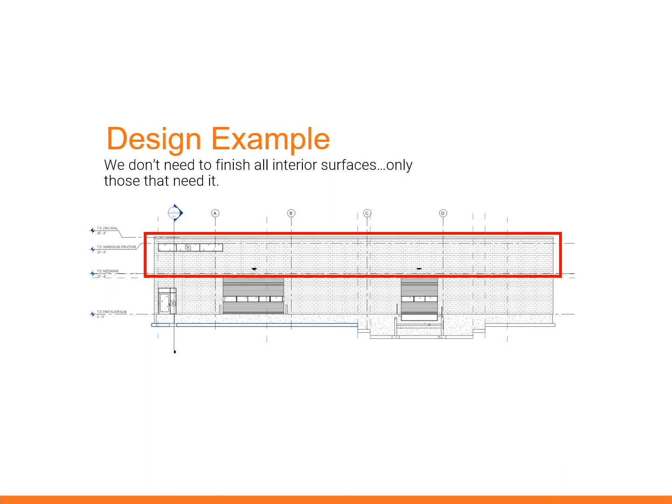So I mentioned you didn't have to finish off all the walls, or the entire elevation of any given wall. This is the flexibility that ComCheck gives you. So now the north wall, we broke it into two different types of units or finishes. This is where you have the furring and insulation. This is just the block where my cursor is, 0.151. We're 2% better than the code, which is a little bit better than where we were.

There are also next generation units like this I showed you, they have inserts. These tend to be more expensive than just foaming a block, but NCMA's calculator will handle very simple units that have one insert over the face shell. You can see when they plug that in, you get up to 8% better than the code. But with these types of units, you always want to verify and get test data from them, hotbox test data, because there are some folks that tend to over-exaggerate. They confuse thermal mass performance and add that into their steady state R value, and that's not what the code allows you to do.

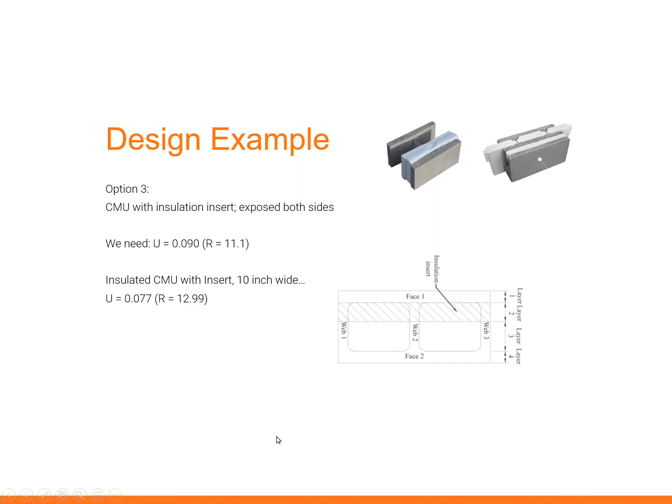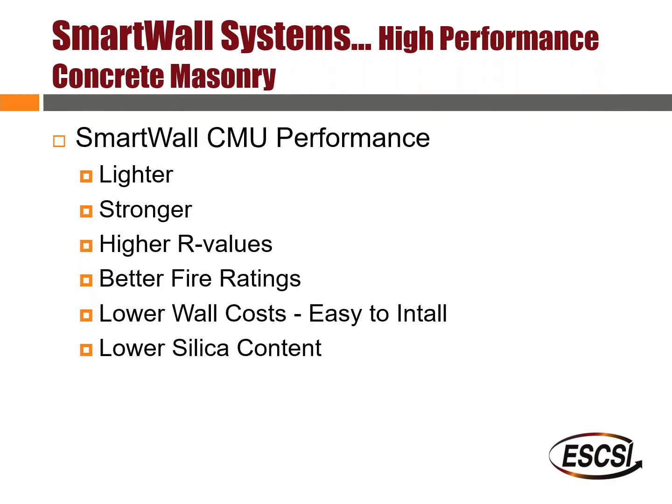But in summary, as I get ready to conclude and leave some time for questions, smart wall block, they're lighter, stronger, going to give you higher R values, better fire rating, lower wall cost, and lower silica content for masons installing them. The learning objectives we covered: you learned what smart wall are, understand that they outperform normal block in many ways. Lightweight, next generation, and the third one even takes it a step further.

And then finally, I haven't covered it yet, but I'll show you here in a second, the way to specify this is pretty straightforward. 93 pound per cubic foot maximum density for the concrete. They have to be 2,500 PSI strength minimum, and the material has to be expanded shale, clay, and slate. We have a sample guide spec, but really those three items right there will get you the smart wall unit across the country.

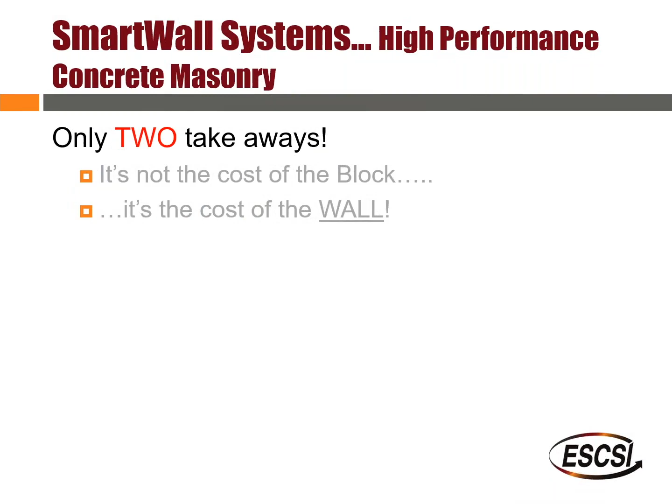And you have to remember, it's really only one cost, one takeaway. It's not the cost of the block, it's the cost of the wall. But really, you should also consider there are two takeaways. You're going to have a better product, and you're going to have, like I just mentioned, better energy, fire ratings, seismic, structural, so on.

So that's our little 'how lightweight block enhances every CMU wall property' presentation.